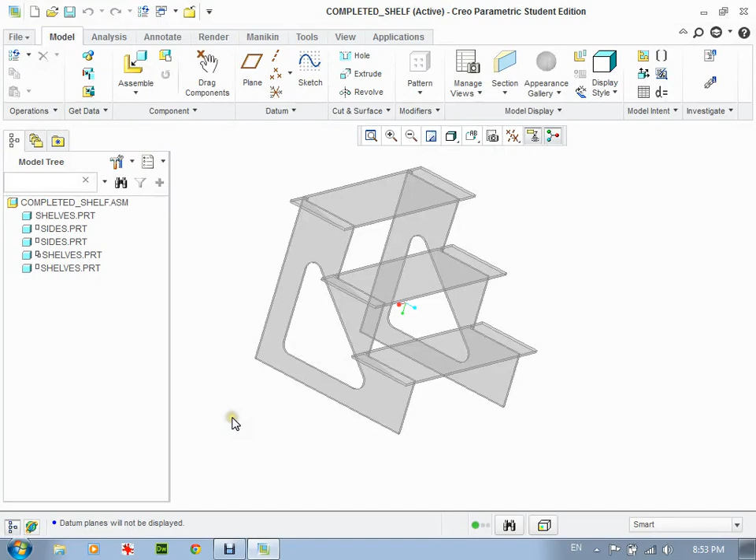This is a tutorial on how to go from Creo Parametric to the laser engraver. I've started with a basic file here, and if you notice there's 3 shelves and 2 ends. What I want to do is take it from this 3D model and basically put it to a 2D to be ready to cut on the laser engraver.

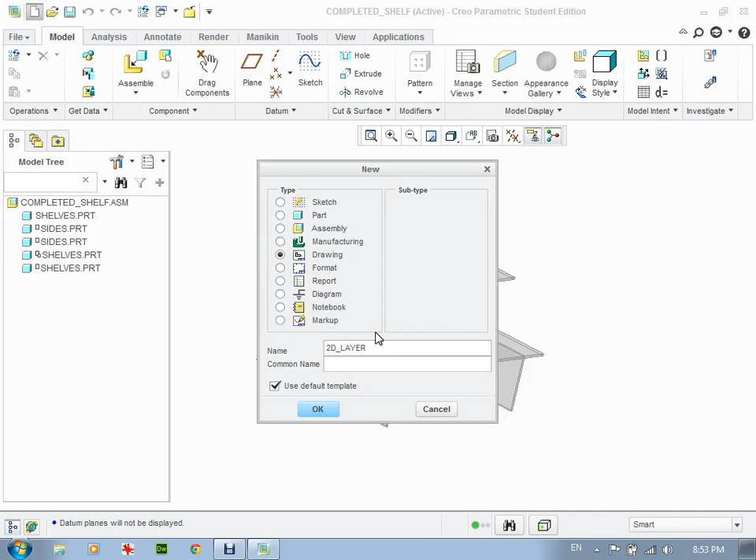So what I'm going to do is start off by creating a new drawing file. So there's my finished product. I'm just going to go to New, go to Drawing. I'm going to call this 2D underscore layer, and I'll call it layout as well. Notice I've got no spaces in there.

And I'm going to take off this use default template and click on OK. The first thing is this default model. I'm actually going to lose the entire model, so it's blank. So I'll specify template empty.

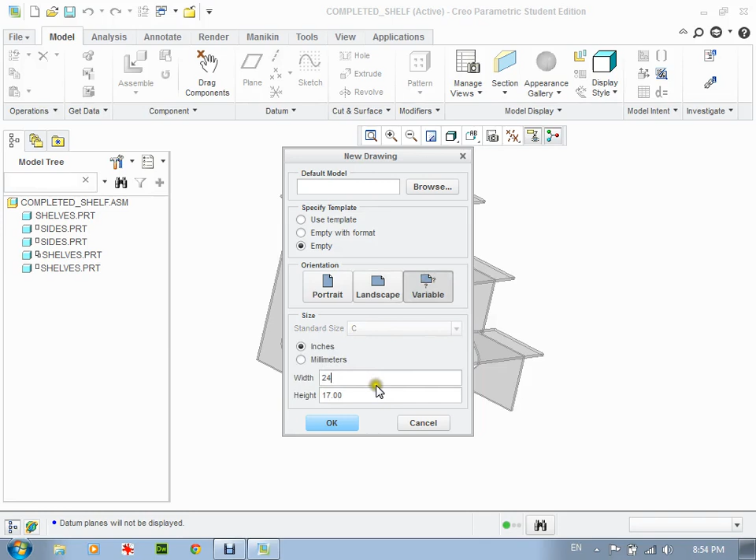Where it says orientation, I'm going to go to use our variable. I'm going to change this to be 24 by 12 because this is the size of the laser engraver bed. And I'm going to click on OK. Right, so now I have basically the default laser engraver bed right here, 24 by 12.

And what I'm going to do now is bring in the different parts. So I'm going to go to Drawing Models, and I'm going to go to Add Model, and grab the shelf first and go OK, or Open. And I'm going to go back up to Add Model, and grab the sides and go OK.

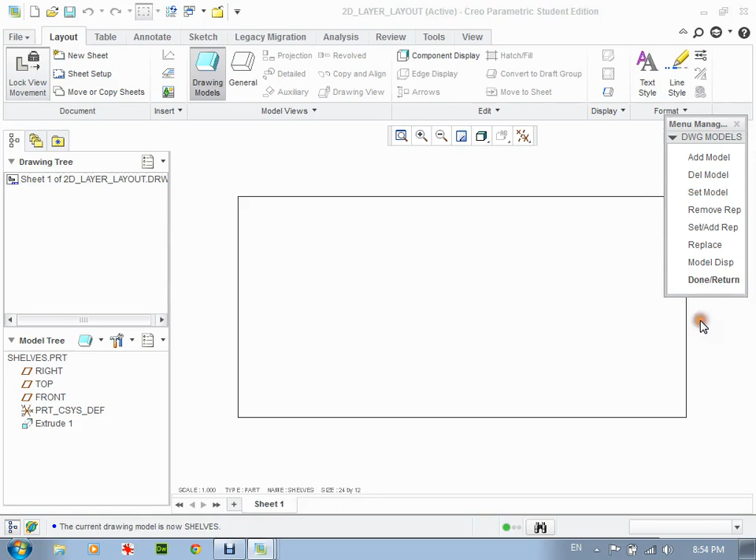So now, when I come down here to Set Model, you'll see down the bottom here there's the 2 different models. I'm going to start with the shelves. So click on the shelves, and I can close this or leave that open, I guess.

I'm going to come up here to the general view, and I'm going to leave it as no combined state. Click on OK. And now down at the bottom here it says select center point for drawing view. I'm just going to click over here somewhere, it doesn't really matter. And the drawing comes in.

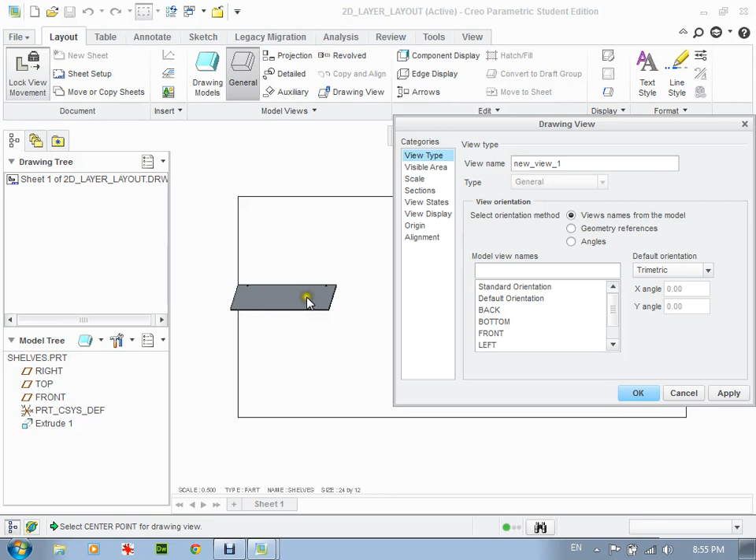Now I don't like it in kind of the isometric view here, so I'm going to change it over to not view states but view display, and go to follow environment. I'm going to take it to no hidden. So what that does is basically takes out all the hidden lines.

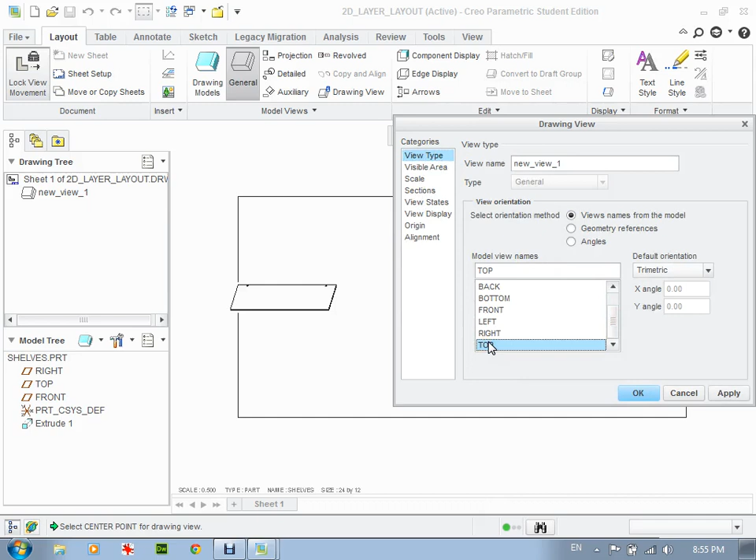Then I'm going to go back up to view type, and in here I'm going to look at it from the top view. If I apply, you can see now it's at the top view. And I'm also going to change the angle 90 degrees. So I'm going to go here, go 90, and apply. I'm going to hit OK.

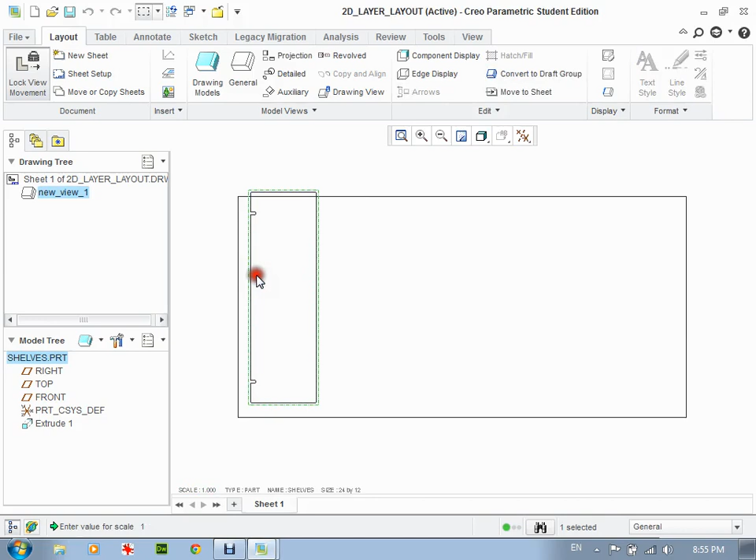Now, there's my model, but if you look down here at the bottom, the scale is half scale. I want this 1 to 1, so I'm going to double click on it, just change that to 1. So there's now my model, and I can move this around now. Right mouse click, go with lock view movement. Now I can move it around. So there's my first part brought in.

Now what I can do is I'm going to put 3 more of these in eventually, so actually I'll just do it right now.

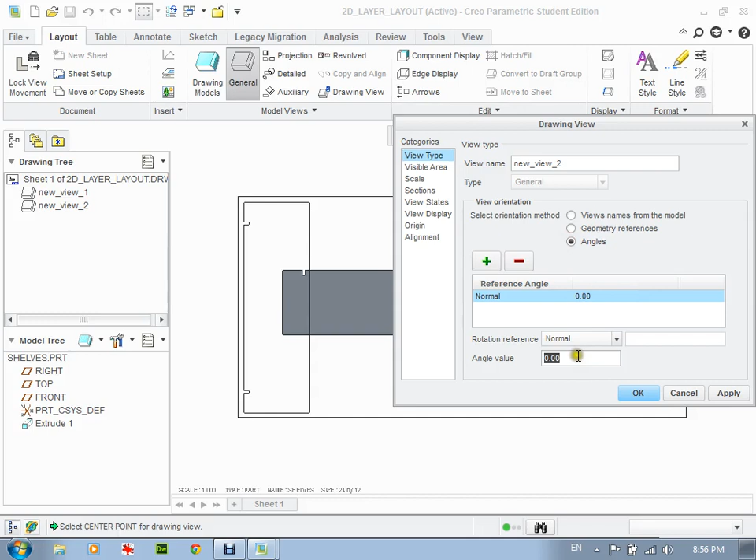So I'll go General, No Combined, click here, and go back to Top, apply an angle, put 90 and apply, and then go to view display, and change that to no hidden, apply.

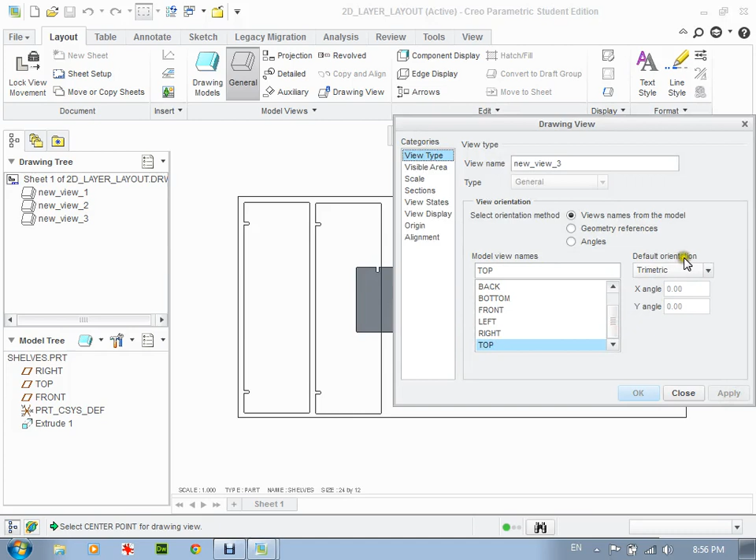Okay, so there's my next part, and what the heck, I'll put the third one in right away. It just goes back the same process, right? So top, apply, angle 90. I'm only doing this because I have multiple parts here. And finally, view display, I'm going to take that and go to no hidden again.

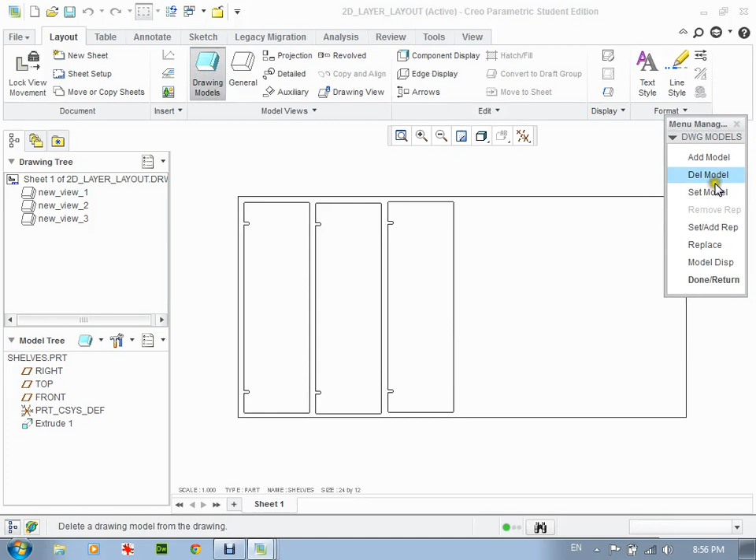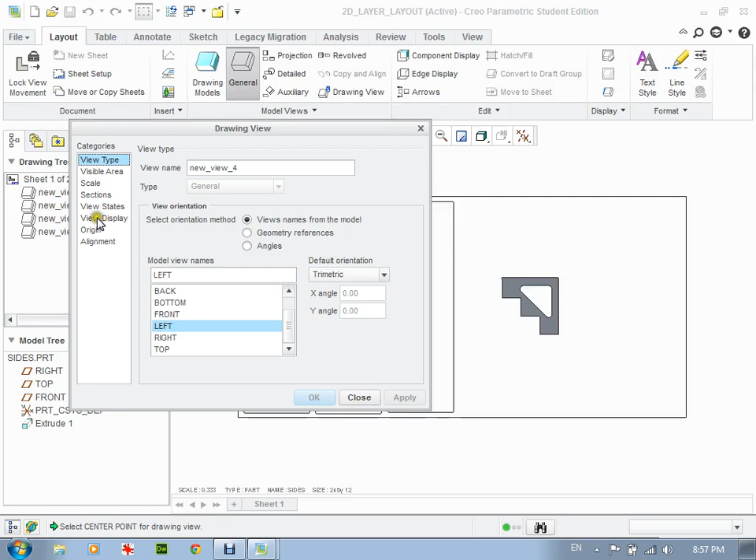Okay, close, and there's my 3 pieces. Now I'm going to go and get the sides in there. So back to drawing model, set model, and change it to the sides this time. Now I can go to general. Okay, place it. This time let's move this out of the way over to here, so you can see it. I want the left side, go apply. I don't need to change the angle on this one, so I'll leave it.

View display, I'm going to go back to no hidden and apply. And here, if you see the scale's coming in at 0.33, I'm going to double click it and just change that to 1. I can take this and move it over to the side. And then finally the last one comes in as just the second part. I'm just going to change that as normal.

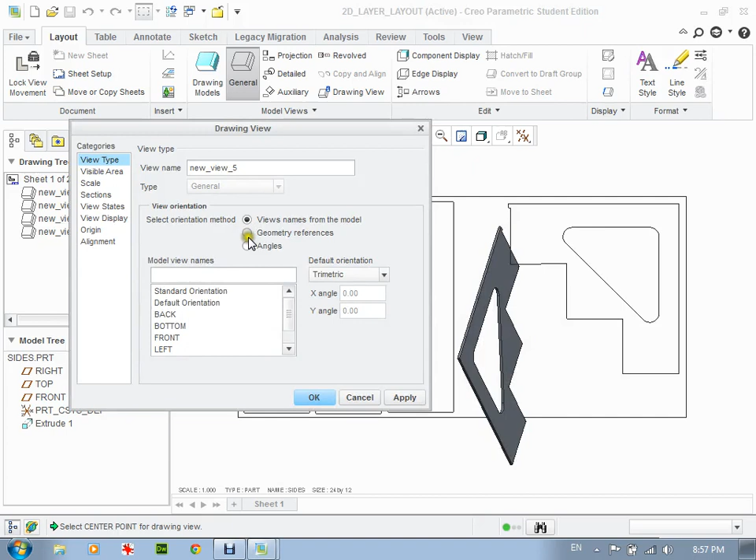Left, let's see, what does the left go? Let's go to the right. Doesn't really matter actually, just messes you up. Okay, so there's right. I'm going to go angle, change that by 90 and hit apply. There we go. And I'm going to go to view display and no hidden.

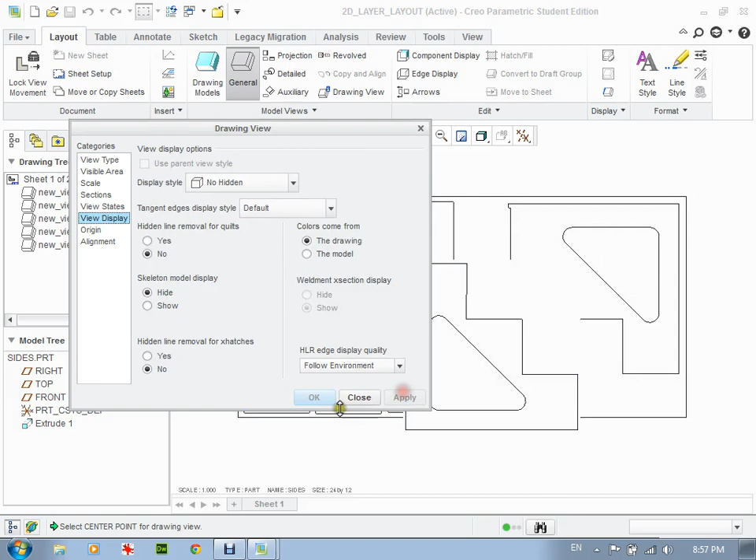Okay, so the last thing I do is just bring this in right like this, and let's see, down a bit. Hang on a second. It doesn't want to fit in here. So I guess I'm going to have to move this guy around a bit. That guy goes like that. So how am I going to get this in there now? I don't know how it's going to fit.

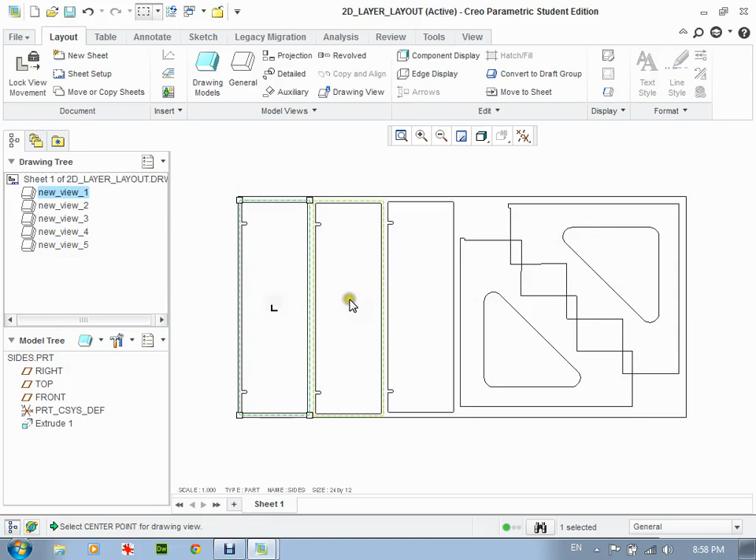Well, maybe I can just squeeze these guys over a little bit more, squeeze this over a bit more. I'm just going to zoom in once more, and maybe not. And this one over, this guy over, this guy just like that, and this guy, there we go. Now it fits on, just barely. Let's move that a bit more. Anyways, you get the point here.

So there it is, all on the laser engraved bed within the 24 by 12. I'm going to save it right away so I have a copy of it. Okay, and then the last thing I can do is export out, and then we'll go to the next part and the next program.

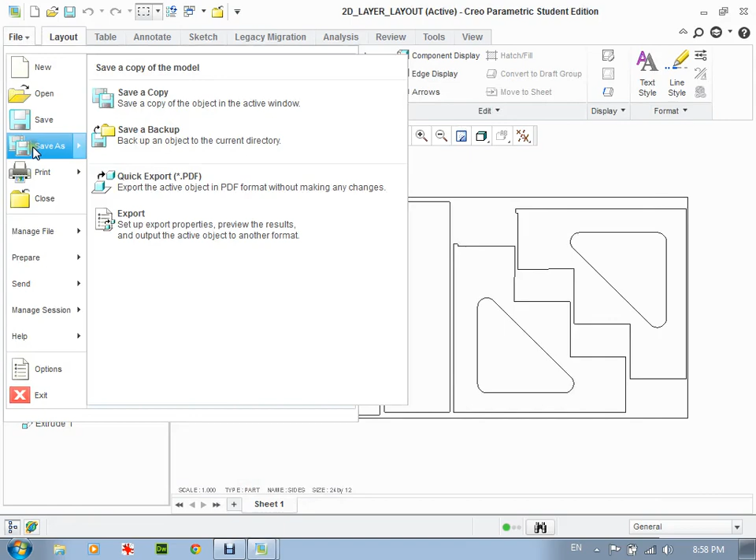So I can go File, Save As, Export. Different ways to do this, but I'm going to go DXF, and just hit Export. Okay, and now it's exported out, I'm just going to close this, and I'm going to stop here, and come back with another piece of software called progeCAD and bring it in and do the last little bit.